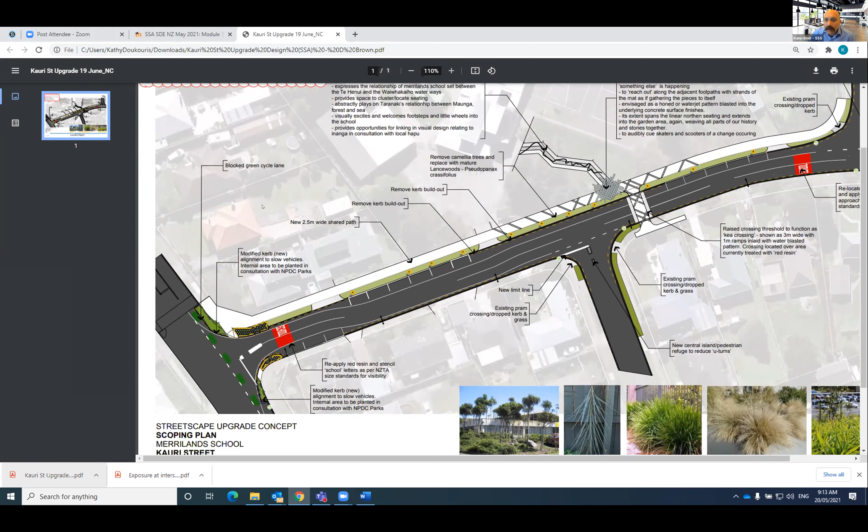Kathy's bringing it up on screen. All right. Yeah. Okay, I see. So what... okay. Is that a new raised crossing going in? Right. Yep. Yes. What I would do for this one, hang on, have we got... We don't have side road volumes. Okay. I would just take the intersections and do them as one in this scenario.

If I was doing this as a full safe system set, actually, I probably would, just because the focus of the treatment is that pedestrian crossing facility and there's some intersection upgrades, but I think you would add your intersection scores. So take the volume of 1,000 for the subject road, add the volume of your T intersection road, or a predicted volume if you don't have that, add the minor little roads on the side, get an intersection score for exposure. Then your likelihood may be swayed by a particular road there. It could be something to do with the T intersection at the top, which I dare say will be your most significant area, and you can talk about different features there, but your sight lines and things off the other one to influence likelihood.

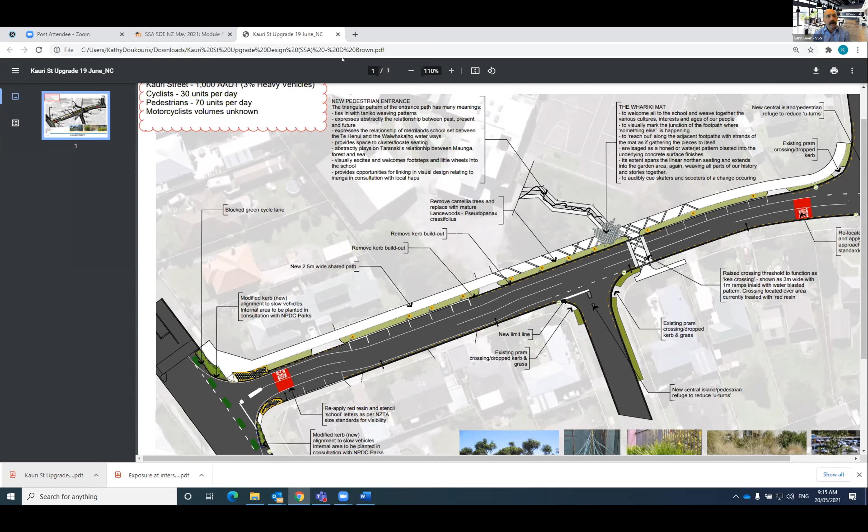And then severity is going to be determined by vehicle speeds. So for the purpose of this one, just lump it all in together, add up those volumes to give you your intersection score. Yeah, it's an interesting one. I'm going to have a bit of a deeper look at that design before I mark the assignments of those people who got that site, because I don't think I've looked at that yet.

For the exercise, can we assume a higher operating speed if the lane widths are wide? Well, okay, it depends. Are you talking about actual speed data collection, where somebody's collected speed data and you're wanting to adjust that based on lane width? Well, I think speed data is speed data. But if you're saying it's a 60k speed zone with really wide lanes and I don't have any speed data, then those sort of factors would aid you in making assumptions on the operating speed. You go, actually, it's really wide, really straight, really open, I think 85th percentile or operating speeds are going to be higher than the speed limit. So yeah, you certainly use that information to help inform your scoring there.

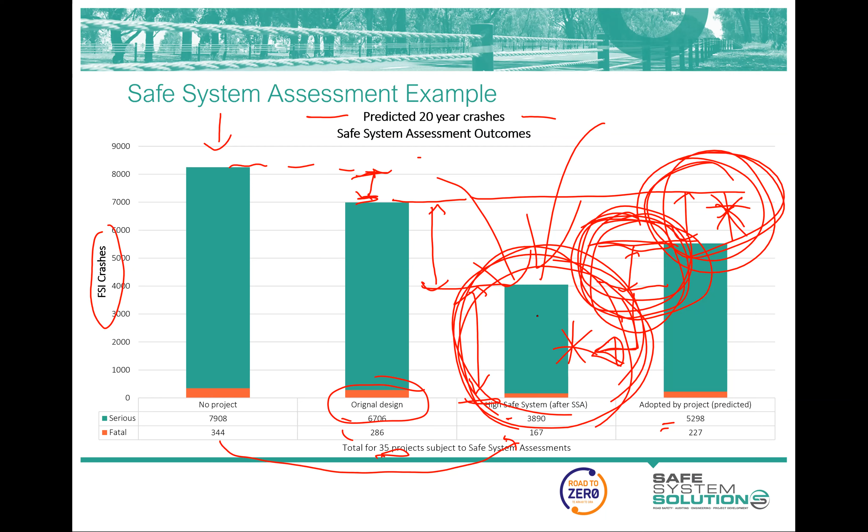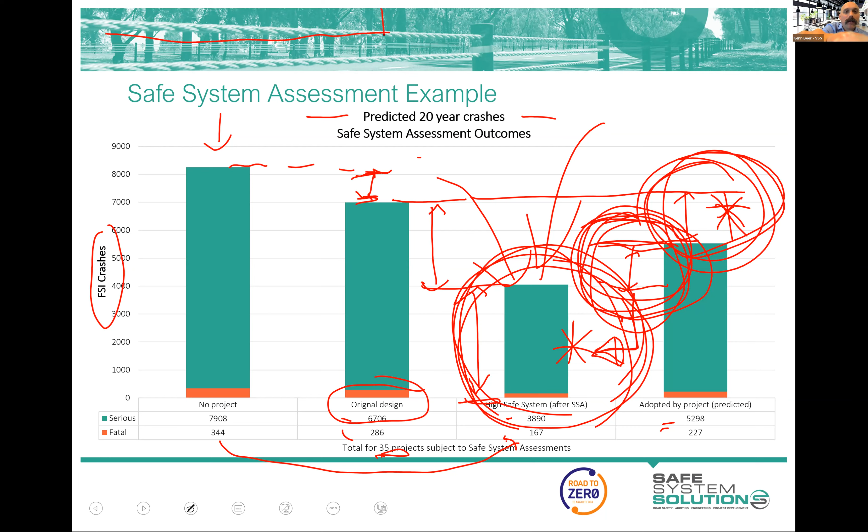Okay. Yeah, I see. I think I see what you're saying. So if you have a road, hopefully you can see that, a road, and you've got a side road intersection, but the main road is here, right? And really the project's about sort of upgrading this intersection.

Think about your run-off road, head-on and likely your other, pretty much just associated with this main road. Don't go down this road or this road, because it's just going to skew your likelihood and severity scores, because your volumes are going to be based on this volume.

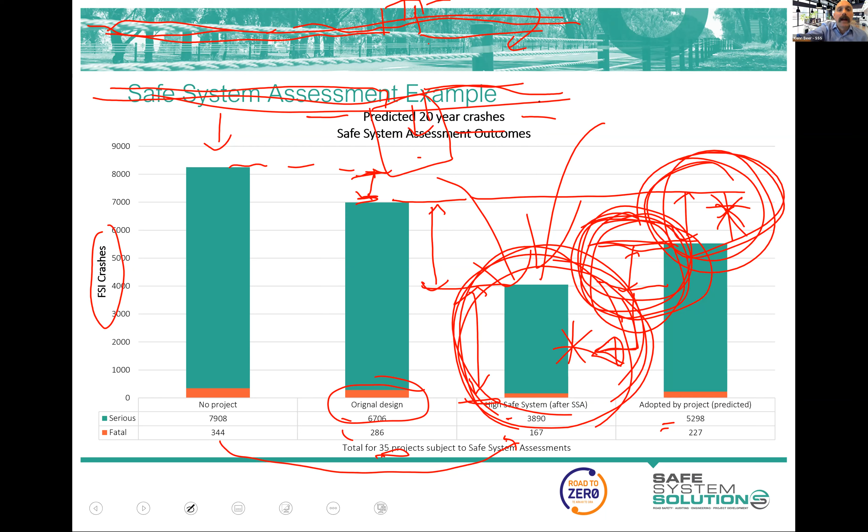So if you did want to go down these other roads, you would have to sort of do individual assessments for that and for that. But for the purposes of your assignment, we want it sort of built on this main road. So your head-on, your run-off road, and then your intersection is just going to be, again, sort of within the, probably, the approach, little bit of approaches to that.

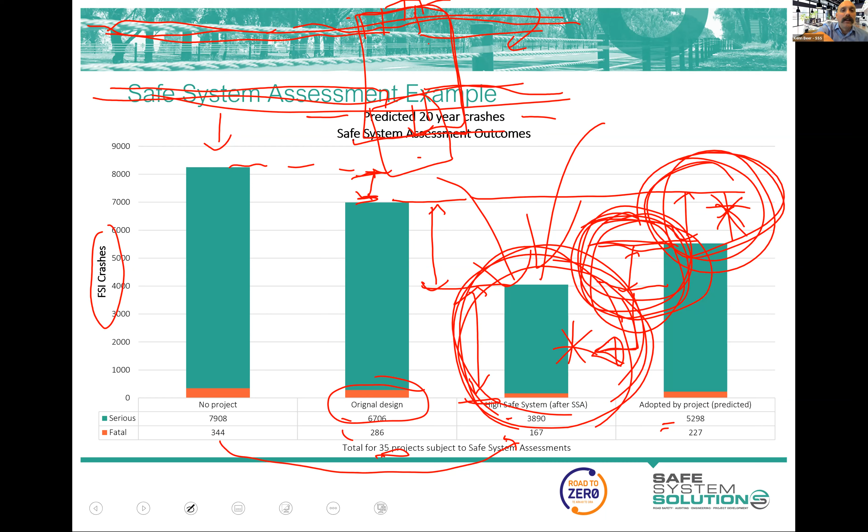For likelihood and severity, it's obviously going to be speeds of this and speeds of this and angles and heavy vehicles and the like. And yeah, motorcyclists, cyclists, and pedestrians are going to be whatever's in that sort of area for intersections, but also thinking about them along this length of road. I hope that makes sense. If it doesn't, please let us know.

Well, the reality of that is that if you've got a road with a main traffic volume, like 10,000 vehicles a day or something on your main drag, and these are side roads with like 500 or 200 or the like, to allocate the likelihood score from a low volume road to a high volume is just, you're fudging your accounting of your matrix by doing that. Okay, just some final comments.

Yep, and that's all good. Confirmation, it makes sense. It should be driven from the client side to ensure that SSA is implemented just as a pre-construction safety audit. Yeah, and I'll show you some of the policy requirements from other jurisdictions at the moment. I know New Zealand's got a strong interest in this. I haven't seen anything actually formalised in policy. Maybe somebody knows of something that's come out recently, but it's in your strategy, obviously. But whether it's a documented part of business case development or requirement, it will be good to see something like that come into play.

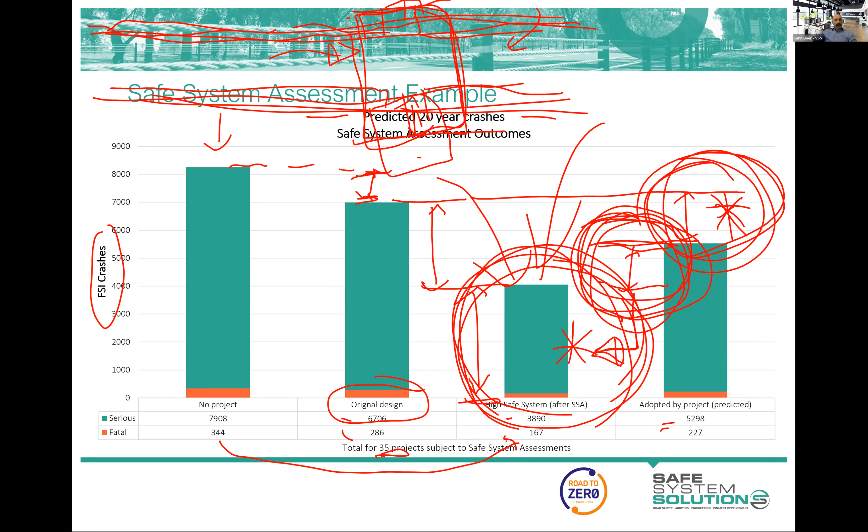Certainly made a mess of this slide, haven't I? So let's delete all that.

So just a few dot points of benefits of the safe system assessment process. Obviously, it's now a consistent way and an Austroads approved way of determining how well a project aligns with safe system principles. It's a really good method to compare project design options. And you saw that, I think, from the example that I ran through last week where there were 3 options of a roundabout or 2 signalised intersection options.

So you can clearly say which one is better than the other. And for those who are road safety auditors, we know that's not what you should do in a road safety audit. You're not there to compare, you're just there to comment on the specifics of each of the projects. But this is a great tool for that comparison.

It provides good information on the design changes that can be made to bring things closer to alignment with safe system principles. Really good assistance for planners, designers, project managers to take this idea of the safe system from theory to practice. And really, I did find very much in the early days, and it still continues now, the frustration from a lot of people that the safe system's talked about a lot, and Vision Zero's talked about a lot. There's a lot of statements where you're like, yeah, well, okay, we all agree there should be no death or serious injury as an aspiration, we don't want people killed and seriously injured on the road.

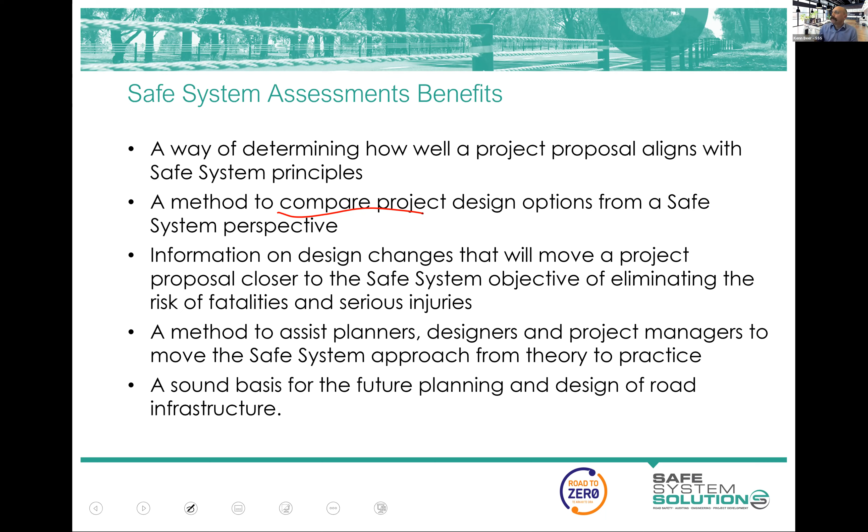And yeah, so it actually makes it practical, which I think is great. And it's a good basis for future planning, design, and infrastructure. So I was going to talk to you about the process guidance. And I'll jump into this unless, Kathy, something else has popped up in terms of questions at this stage.

Yes, it has. Do you think safe system assessment will become a requirement within Austroads? And just a follow-up comment to that, I'm asking because we look at a lot of development designs driven by others, and they consider the drivers to be compliant. I think that's what it's trying to say. Michael, let me know if I've got that wrong.

Right. So there's a lot in that question. So the first thing I'd say is Austroads doesn't like to get in the space of dictating to a jurisdiction what they must or must not do. That's up to your council or your National Road Authority or the like. Austroads doesn't want to get into that. They like to provide guidance, and hence they're all Austroads guides, aren't they? There are standards prescribed in different areas, not by Austroads, and they're more prescriptive. But a lot of jurisdictions just say, well, we'll adopt what Austroads is suggesting.

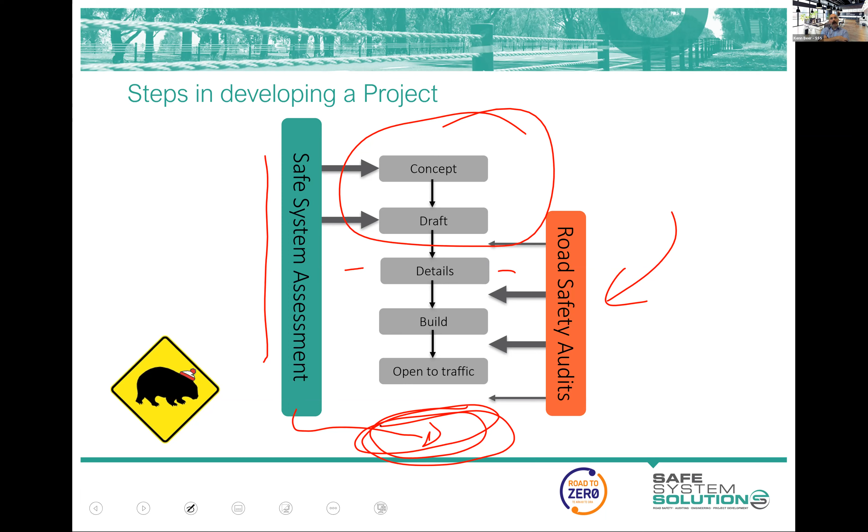They often find some things that aren't quite relevant to the crash that happened because they're forced to go through this process, but I think that's kind of a good thing sometimes. So anyway, it's quite a versatile tool.

Anything else there, Kathy? No, all good. Thank you, Ken.

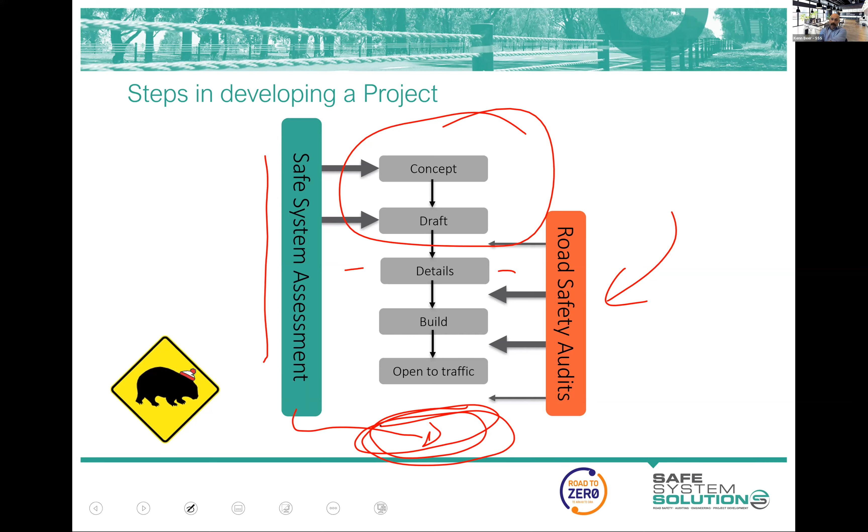So a little bit more on that difference between a safe system assessment and a road safety audit. And this is really generic stuff. I know some auditors do things in a slightly different way to others, and maybe I'm being a bit broad and harsh sometimes on this, but issues that impact the likelihood of crashes, audits and safe system assessments both do that, and they do that really well. The severity of crashes, I say sometimes in a road safety audit.

Now, the reason I say that, it's part of a road safety audit. You can't get to a risk without looking at severity, but the number of road safety audits I see that just blindly, completely ignore the severity of crashes when they happen. The classic is your signalised intersection between two high-speed roads, and the audit doesn't even entertain the severity of crash when it happens. It's all about trying to stop the crash happening in the first place, which is hugely important, but that's all the likelihood stuff, and that severity is just sort of ignored.

That's why I say sometimes. Yeah. Identifies issues on exposure. Well, yeah, audits really, well, if they do, it's all embedded in likelihood anyway. And provides recommendations that improve road safety outcomes. I say they both do, absolutely. Considers all road users. Yep, they both do that.

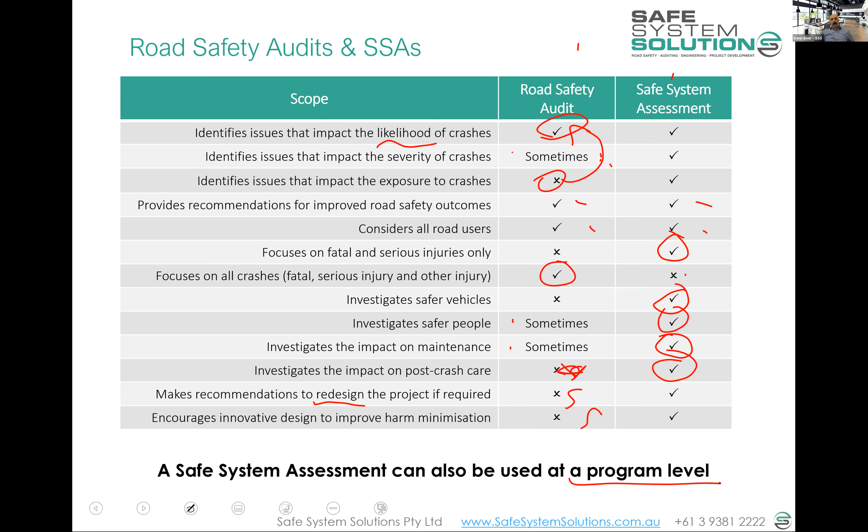Encourages innovative designs to improve harm. Again, maybe some really advanced auditors are starting to think about that, but anyway, there's a little comparison for you. Safe system assessment can also be used at a program level. And I find that an interesting one as well. You can analyze whole programs to see how well they align with safe systems.

So let's go through the process. The process laid out says something along these lines. So you determine, first of all, what's the level of safe system assessment that's going to happen on your project. Now, there are two types of assessments that have emerged: a full safe system assessment and a rapid safe system assessment. These were conjured up by the Victorian Road Authority and then taken on by the South Australians, and Queenslanders are now taking them on.

They were termed full and rapid, and I think Queensland's called them full safe system and light safe system assessment. But it's all embedded into the depth of analysis that you do. And I'll show you the difference between the two shortly. But somebody responsible for the end asset, ideally, so the road authority, the council, the National Road Authority, should be saying, okay, this project needs a full safe system assessment, or this can have a rapid safe system assessment, or this doesn't need one at all. So somebody needs to make those decisions.

And then the safe system assessment team is selected, and New Zealand's probably one of the best places established to select safe system assessment teams to a degree, because you don't have a register of road safety auditors, nor do you have a register of safe system assessors. So you'd use the same sort of process. You'd say, well, they just need to be reasonably qualified and have done some training in the safe system assessment space and know what they're doing.

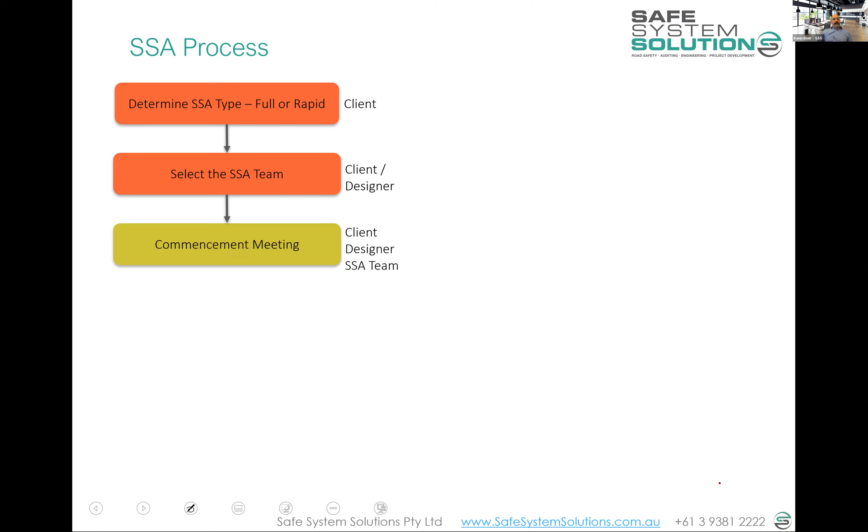Then some sort of commencement meeting or discussion or handing over of designs, gathering information, intel, and that understanding of the project context. So you're going to get everybody in the room together or have a Zoom or a Teams meeting, or be sending over lots of correspondence and answering lots of questions, so the safe system assessment team has that full understanding and all the documentation they need to do their assessment.

Then there's a site inspection. So the safe system assessment team gets out there, looks at the site as you are going to do or have done with yours. And you gather an understanding of how it operates now, the existing conditions. You look at your design and you go, okay, I can see where that's going to alter here, and that might bring up some issues here.

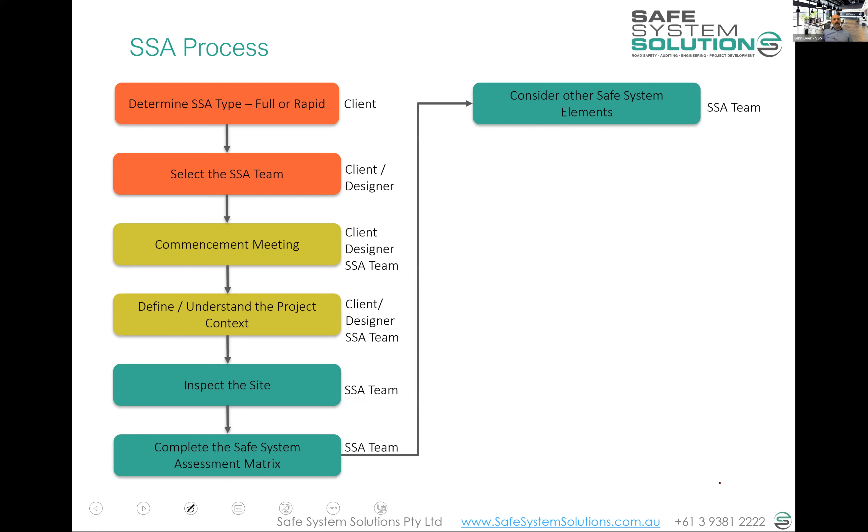All the pedestrians are crossing back there, but they're going to put their crossing down there. I wonder how that's going to work. Are they actually going to use it? You start asking all of those typical on-site questions. Then you complete the matrix, or as many matrices as you've decided need to be produced. You go through that consideration of the other elements of the safe system through those documented questions.

Identify treatments that improve alignment with safe system principles for every single design that they've given. You write up this report, and you've got the template of a report available to you. And it's handed over to the client, and then they respond to that. So in that template, you'll see that there's a column left blank for client response. So it's saying to them, there you go, there are ideas. Now it's over to you to decide whether you're going to do those or not do those or do something

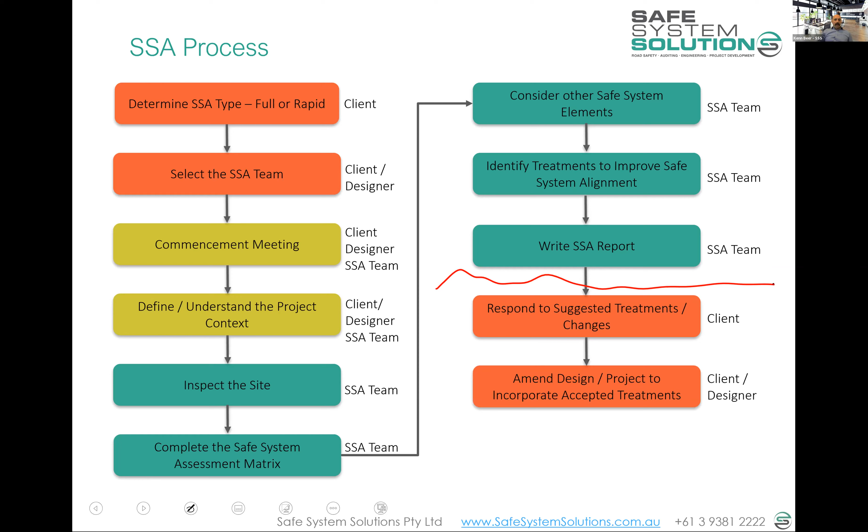different. A bit like a road safety audit, the responsibility of the safe system assessment team really ends there. It's over to the client to do what they want to do with that. It's advice. But hopefully they amend the designs and incorporate them and make some actual changes to their project, because that's the point of the whole process. Or you get some scores and some ideas, so that might be valuable. So that's the sort of general process.

So once they've amended their design, they may say, can you rescore our new design? So you just drop it back into this point here. Well, actually, you'd redo the matrix, you'd make any comments about alterations to the new one that they've come up with. You'd do a new matrix, you'd add that as a report, and you'd add that column to your big graph that you're producing.

So, you might have done one, and then you say, well, here's your new one, and you brought it all the way down to here and all the way down to here. But this one, actually, whatever you changed, that went up.

Okay. So I'm going to pause there, and then I'll just take you through a couple of things that other jurisdictions have done.

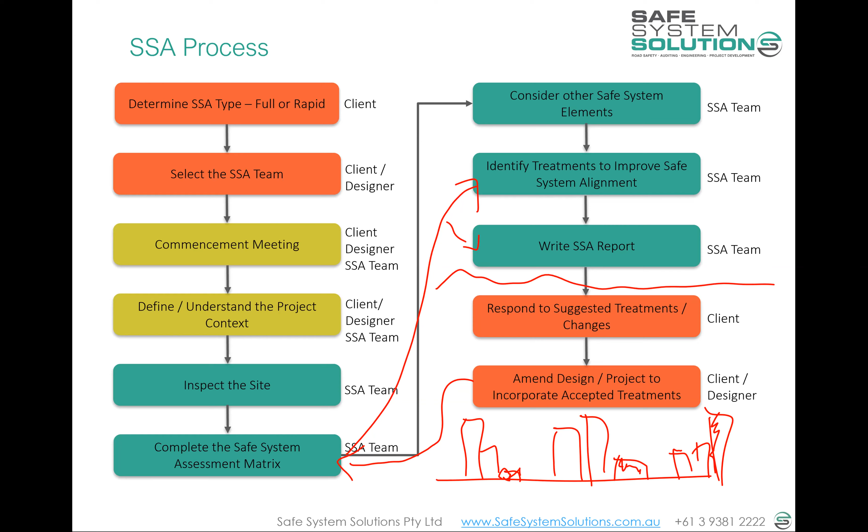But it might be a time for a stretch and a fill up of coffee if you want. So what do you say, Kathy? A 2-minute, 30-second break? 2 minutes, 30 seconds sounds great. And if you've got any questions, just jot them in or pop your hand up. But yes, otherwise, good idea. I'll pause there, and we'll pick up again in about 2 minutes. Okay. About ready to get back into it, Kathy? For sure. Do it. Okay.

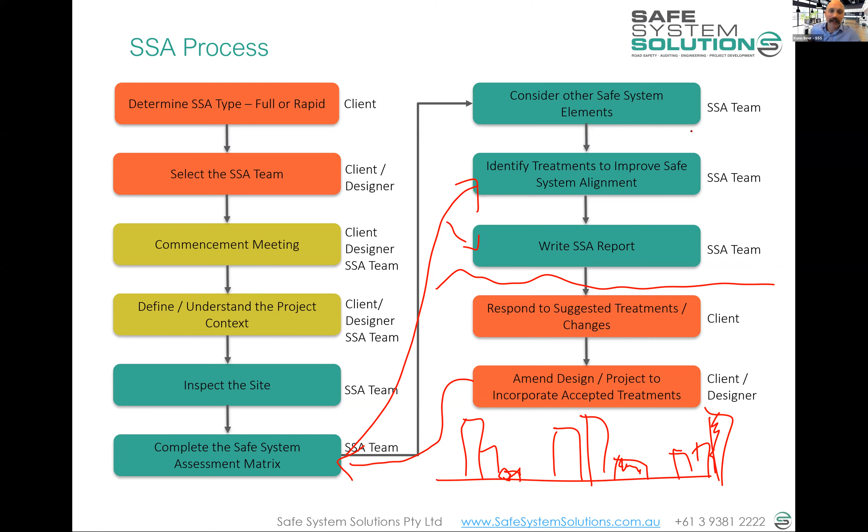So I'll just show you what some of the other jurisdictions are doing, just out of your interest, and you might decide you want to jump onto this. VicRoads or the Victorian government have got their safe system engineering site, and they've got their own guidelines there that you can get a copy of, and they've got the template, which we've given you in Moodle and on your memory stick anyway. So they've got the templates, but they also have this register of recommended safe system assessors.

And their list basically says you need to do some formal training, which is this course, or anything equivalent. They use this course as well. You need to get some experience. You need to do a safe system assessment. And then you need to submit that safe system assessment for them to review and get assurance that you're competent. And then they'll put you on to the list. So they actually then publish a PDF list of safe system assessors, and it's a building list, which is really good. We like to see that. So that's just all that they show you on the list.

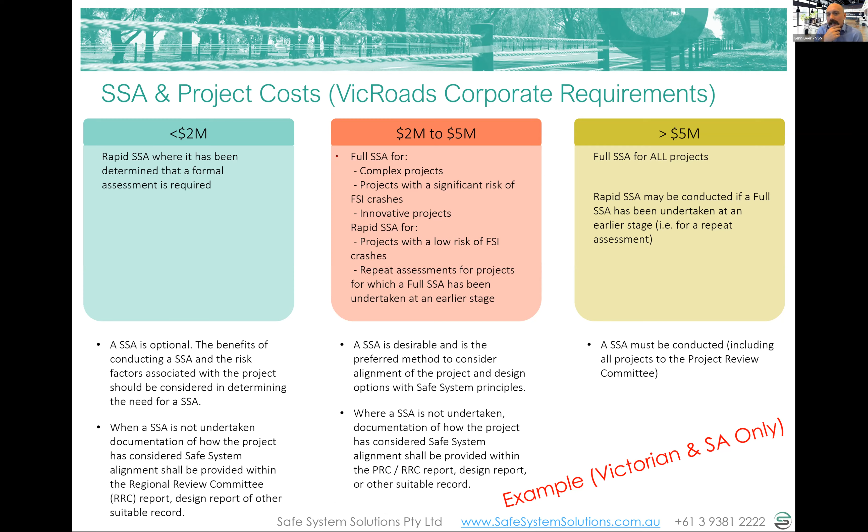So let me tell you the difference between these two, at least the way the South Australians and the Victorians have defined them. So they're saying a full safe system assessment, you've got your commencement meeting, you have background context, you have your workshop, which they still say is sort of optional within that, but it is quite often done. Inspect the site, do the matrix, answer all those qualitative questions about the vehicles, the post-crash care, changes, do the full report. So they've got a template for a full report and a template for a rapid. And then it goes through the process that we talked about.

The rapid one has sort of removed the workshops. It's given an option that you don't need to do a site inspection. Now, we pretty much do a site inspection on everyone, but that's one thing that they've said, well, at least to get a rough indication of how we're aligning, maybe the site inspection could be dropped out. The reports are a bit more streamlined, and you don't actually do those consideration of the other elements. So you don't do those qualitative questions. You don't look so much into post-crash care and those sorts of things. So that's been dropped out as well.

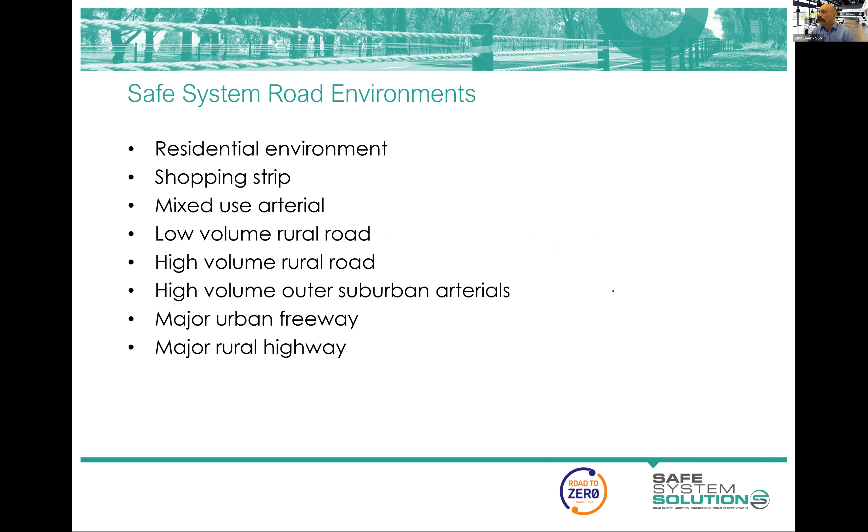Just a question that's popped in whilst everyone's typing away on this one. We ask for RSAs on some new land use developments. Would you recommend SSAs for those as well? That's a good question. I would say not yet. The reason I say not yet is because if your local government isn't even doing safe system assessments on your own projects, to require developers to do this is a bit of a step too far in my mind.

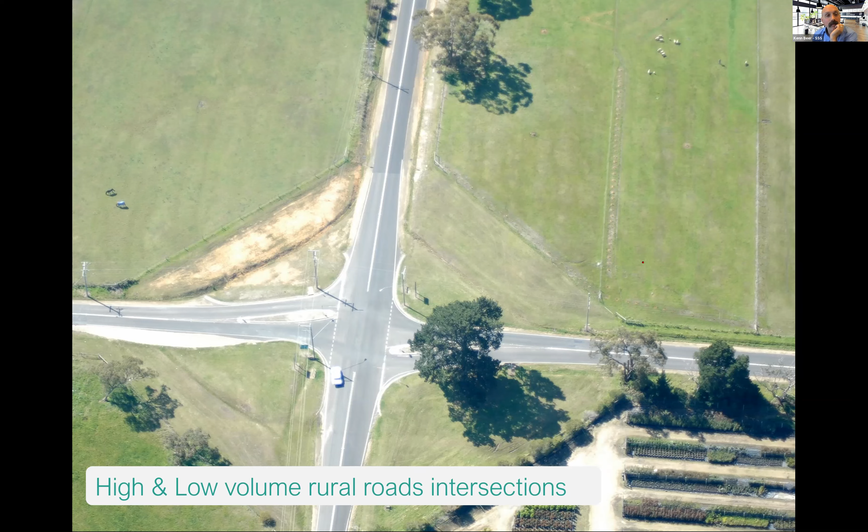But the high volume outer suburban arterial style roads, these are your big traffic, pumping traffic around your growth areas and the like. Things like bike lanes just can't happen on these higher speed roads. So they've got to be completely dedicated, separated facilities, off-road for bikes.

And you really are, if it's that designated traffic corridor, you want to really restrict pedestrians being able to cross anywhere, and you make some defined crossing points and lower the speed significantly at those, provide overpasses, underpasses, and think about your signalised intersections and the speed of those conflict points as well.

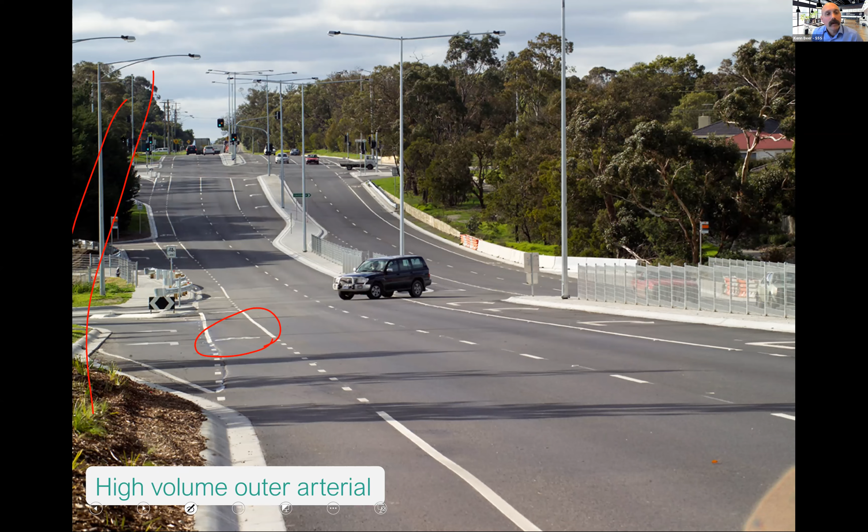Freeways and motorways, they operate really well from a safe system perspective generally, because they generally have full containment, and they have separation, and there's restrictions on vulnerable road user access. Where we see a lot of challenges in urban motorways is during flow breakdown. So when it's operating really smoothly, it's actually really quite good.

When it's absolutely stuffed and gridlocked, from a safe system perspective it performs pretty well, because any of the crashes that happen are very low speed, minor, side swipes, little rear enders, and everybody's okay. Yeah, we don't want that to happen, and that's got congestion issues and a whole lot of other dramas. But it's as the freeway starts to break down in flow at high speed that we see a lot of issues.

So managed motorways become our real go-to tool in reducing the likelihood and severity of crashes. And managed motorways are everything from managing speed, so you can proactively reduce the speed limit before flow breakdown happens. You can tell that by just volumes, headways of vehicles, and some analysis, and you can start to slow speeds before these things happen. You can meter on-ramps.

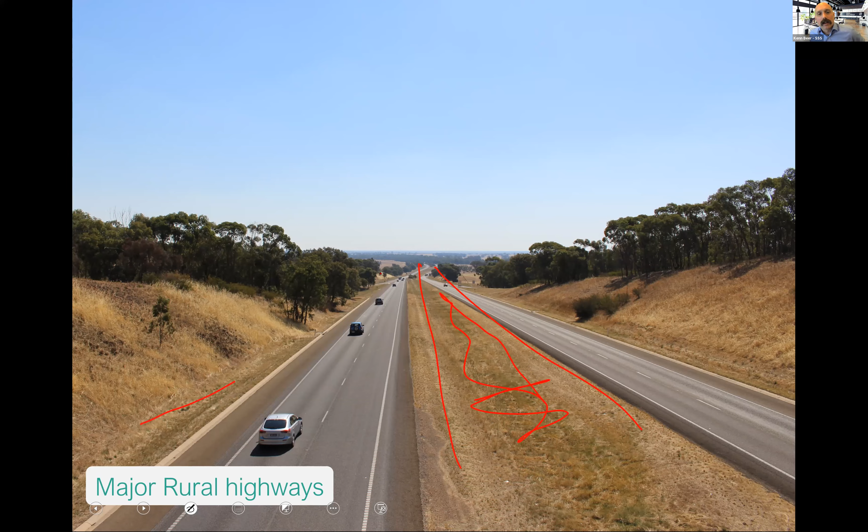And our major rural highways, well, of course, these are going to be full containment with barrier systems. This is an example where, to a degree nowadays, I think it's somewhat redundant to have all that land in the middle because you're going to be putting a central barrier system continually through that anyway, and barrier systems on the outside as well. And the intersections, as we talked about, like the others, are going to be grade separated or deceleration lanes and U-turn facilities and acceleration lanes back.